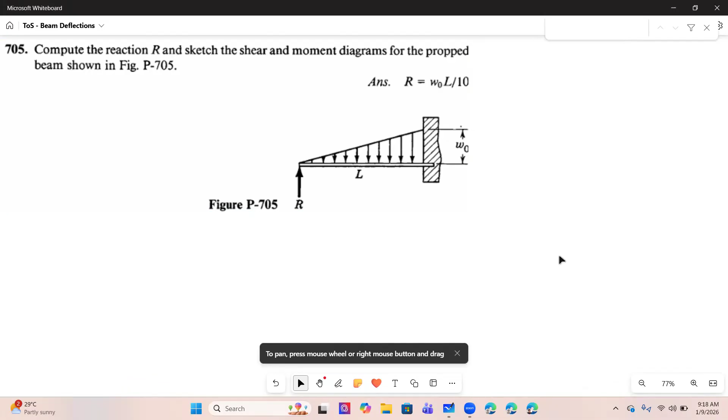Okay, now let's solve a theory of structures problem involving beam deflections, particularly restrained beams, or in this case, a propped beam. One end is fixed, the other end is simply supported. This is very commonly used. So let's compute the reaction R and sketch it.

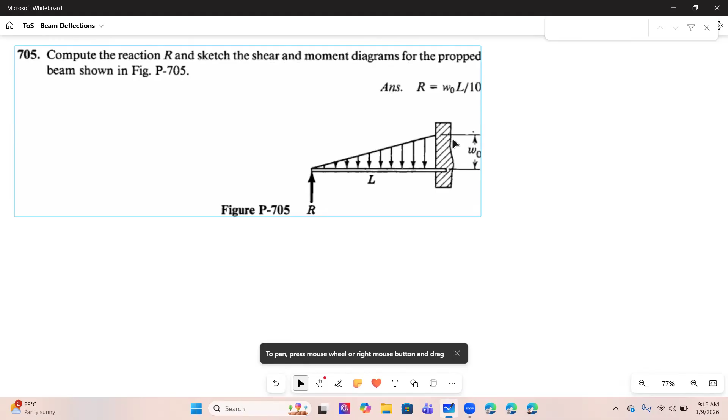We need this reaction often in board exams. When there's a propped beam, the load is triangular, wherein the fixed end has the magnitude, and the other end, at the simple support, is zero.

So we'll use the double integration method for this problem. For DIM, let's assign a variable X. There's no discontinuity in the load here, it's continuous throughout the span, so we can take X anywhere in that span.

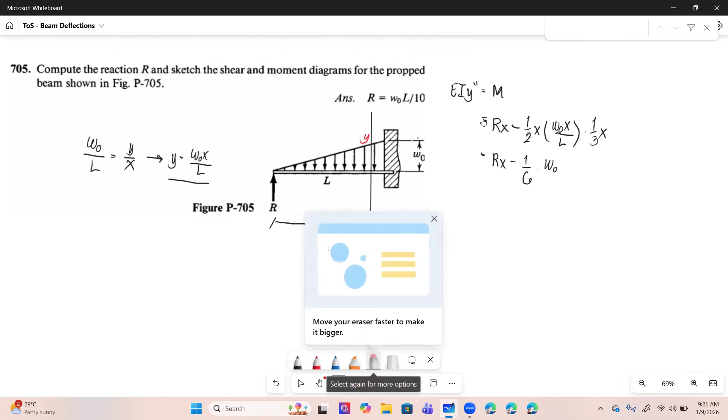That's the moment. So simplifying, Rx minus... that will be 1/6, since 1/2 times 1/3 is 1/6. Then W_O is constant, so I combine it into 1/6, giving W_O over 6. And L is also constant, so I put it here, leaving X cubed.

Now let's integrate that. So EIY double prime integrated with respect to x, with dx, becomes EI y prime. Integrating R, which is a constant, gives X squared over 2.

Then this term becomes W_O, and the exponent increases by 1 to 4, so the denominator also becomes 4. 6 times 4 is 24, giving L, x to the 4th. Since we integrated, we'll have a constant of integration, C1, because in double integration, you integrate twice.

Given that, it's already simplified. Let's integrate again with respect to dx. So that becomes EI y, the deflection formula. It's R over 2, but now this one becomes 3, so Rx cubed over 3 times 2, that's 6, giving x cubed over 6.

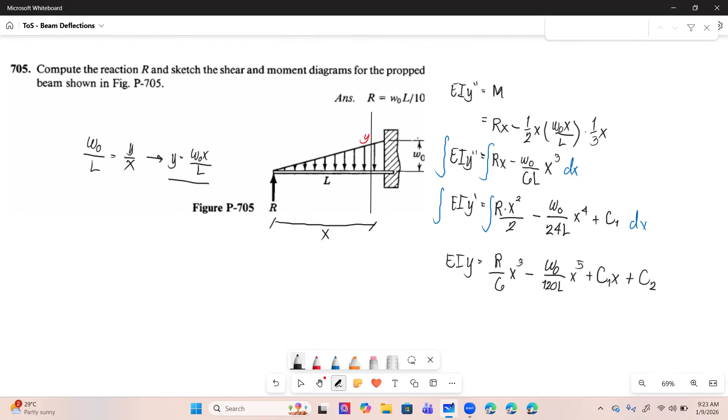Then integrating again gives us a constant, C2. Now we have the values. But we need to solve for C1 and C2, so we have to use the boundary conditions. At x equals 0, which is the support, there's no deflection, but there is a slope.

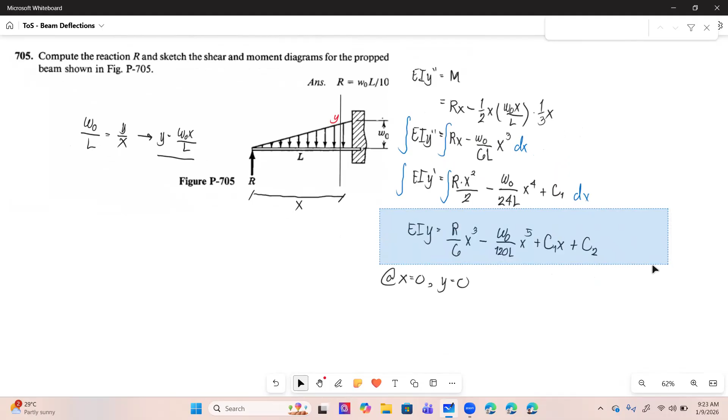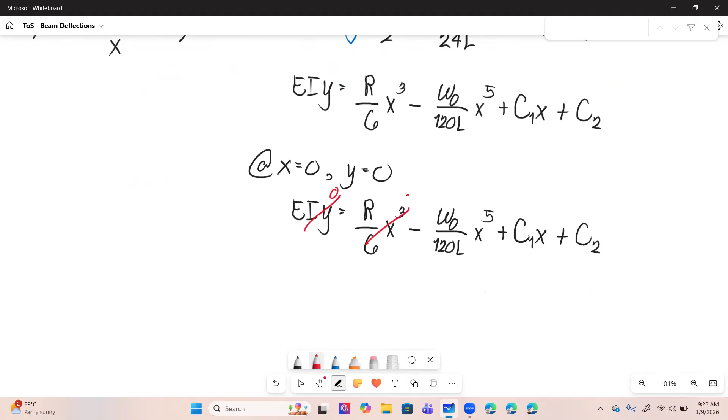So if x is 0, in this case, y is also 0. Substituting that in, when x equals 0, y equals 0, everything with x becomes 0, which means C2 equals 0. This is usually the case, not always, but often, especially when x is 0 and y is 0.

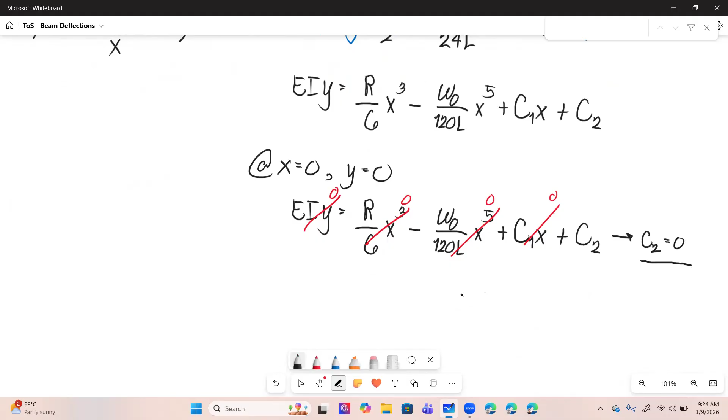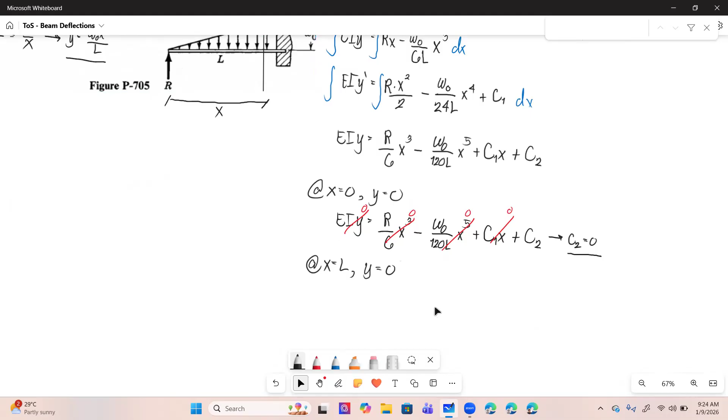Especially when it's like this: x0, y0. Next boundary condition, we have two more: at x equals L, y equals 0. That's another one, at x equals L, the full length, that's the fixed end, so there's no deflection and no slope there either.

So at x equals L, let's arrange it so y equals 0, this must equal 0. At x equals L, let's arrange it. This will be R over 6. It's just algebra from here.

W_O over 120 L, times L to the fifth, plus C1L, with C2 gone already. So rearranging, can we get the value of C1 now? Yes, we can get its value.

So let's transfer this over. It becomes W sub O, L to the fifth over L, which becomes L to the fourth, over 120. Minus R over 6, L cubed.

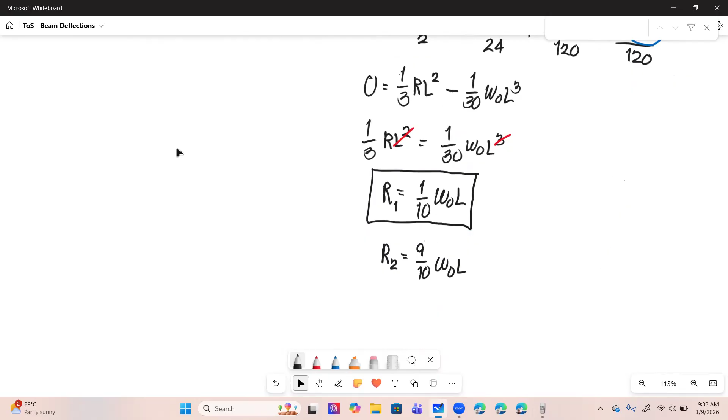That's it, so ayun, na-derive na natin. Magagamit kasi natin yan. Then, tandaan, kapag triangular load, ang reaction sa zero na magnitude is 1/10 lang ng W times L, yung product ng intensity and yung length. Yung malapit naman, yung nasa fixed, is 9/10. So mas malaki yung load doon. And that's it. Hope you learned something.